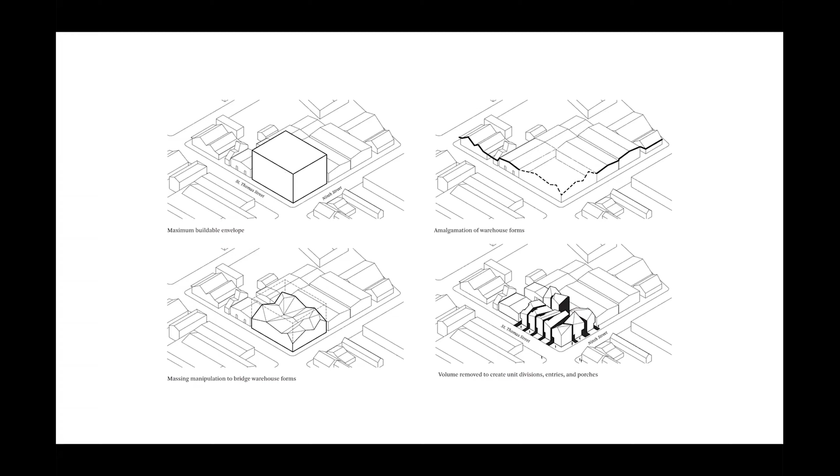This session is really going to be focused on both financing and development strategies that have worked in the past. So we have a really amazing panel of four developers and financial brains, who have really done this kind of work in Los Angeles and across the country. The last session, September 3rd, also a lunchtime session, is going to be focused on a couple of different housing policy topics that can show you how you might be able to leverage the small lots in this initiative to build some really great housing developments.

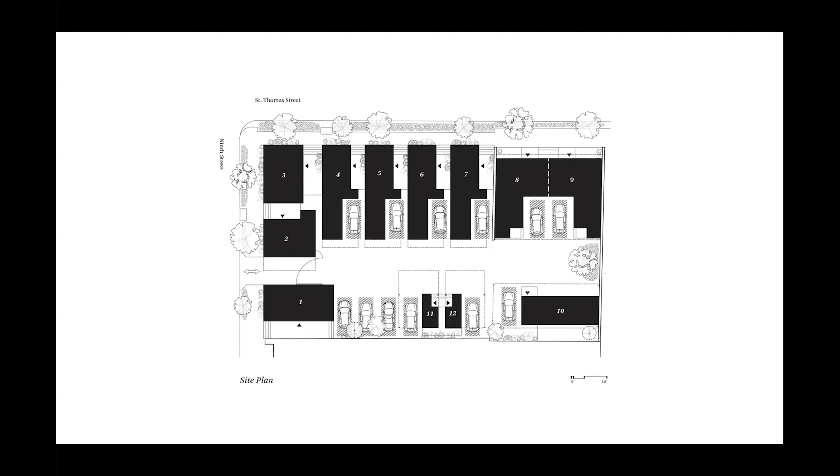Then after him, John Perfitt's going to talk. John's a local developer, been working in LA for many years now, mainly under the moniker, maybe you know him best, at RNLA, a small affordable housing developer who's done a lot of really great work in the city. And then lastly is going to be Tom DeSimone. Tom's another great friend, someone who's been on the project for a long time and also been helping us shape Small Lots since the beginning. Tom works for an organization called Genesis LA that invests in and finances housing and other developments all across Los Angeles too. So that'll be the breadth of experience from all four of them, and then we'll get into some questions.

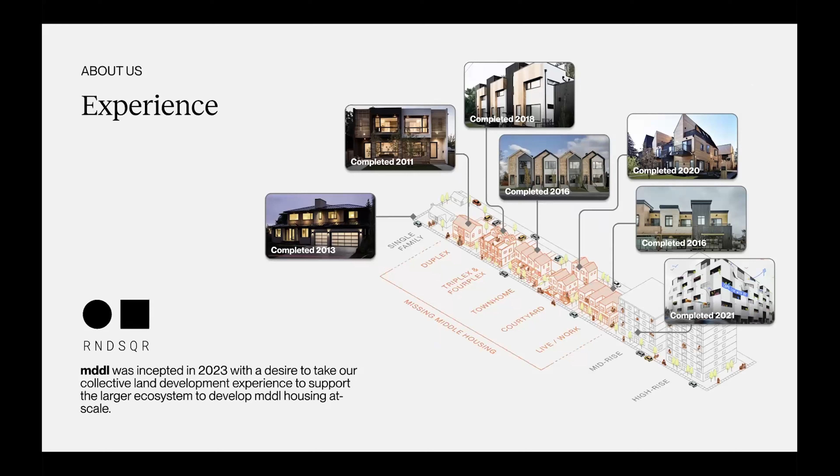But they were all challenging lots. They were small. Typically we called them non-conforming lots, essentially lots that were smaller or irregular, that didn't neatly comply with the zoning ordinance's definition of a standard lot. So we found these all throughout the city. They looked different and were located in odd places.

And these aren't all multifamily. A lot of these are singles and doubles. I realize the scale of what we're looking at here in LA may be a little bit larger, but I think it's interesting to show in this context.

Just to run through a summary of those: the first one, on a small sliver of a lot between a warehouse and an adjacent historic property, was an infill single family house that we developed for sale. These were all speculative houses, not custom homes for individuals. We speculated that there was a market for this, and we found the land to try to utilize that. This was the first project we did, a single family house on a tiny lot. Just for scale, the lot itself was about 16 feet wide, and the house with setbacks is 10 feet wide by 45 feet deep.

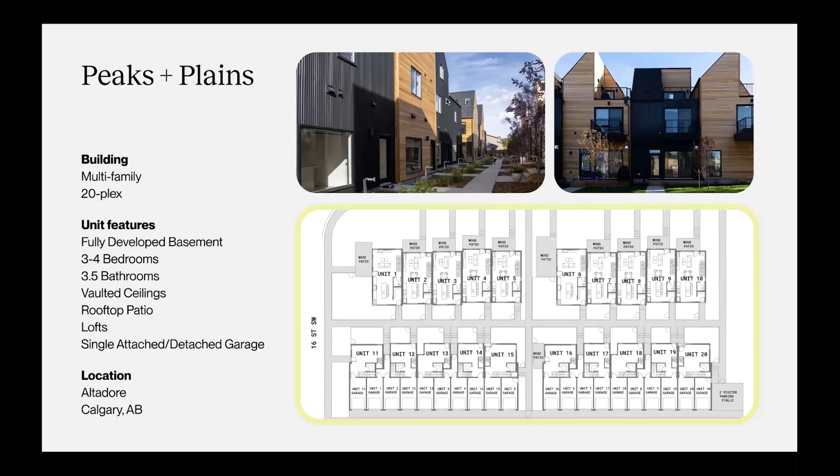That was our objective: how to make it as simple, clean and direct as possible for a home buyer. How do we provide that, or facilitate that. In this case, we had a chance to do 12 units, but the land divisions only allowed for three essentially.

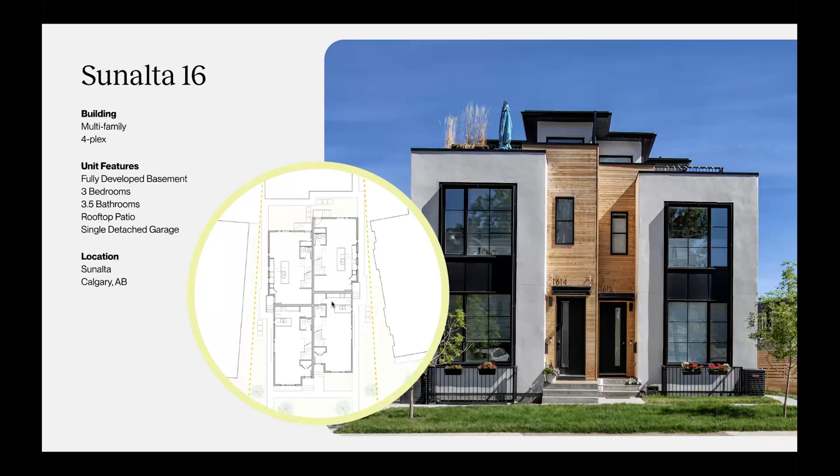So our subdivision regulations were not favorable in this case, and we ended up challenging that. I want to quickly walk through this project and highlight some of the things we discovered and were able to leverage, things I think are potential opportunities you all may see in your own city. Through some imagination and a slight bit of skill, we were able to turn it into a successful project for us.

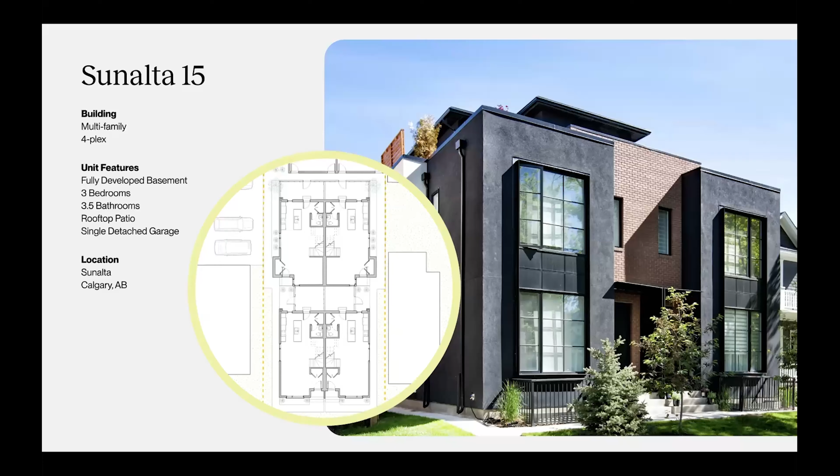One thing was property allocation in general. If the regulations didn't permit us to have 12 single family buildings on the site as simple lots, then we turned to the condominium regime. We crafted a regulatory overlay, or ownership overlay, on the site that comported with the objectives we had for the project. So what you own and what you didn't own, we defined as part of the condominium regime.

Through that, we looked at what the limits were for us in terms of the zoning envelope, but also identified the need for this to work within context, which was sort of light industrial but also very historic, like 1850s-ish residential. So it's a mixed fabric, if you will. We had to navigate both of those, and a desire to provide maximum density, but at the same time really try to mesh it into this fabric.

This is the final project from overhead, you can see here. A few quick things: property allocation, and how we divided the units, were really a big part of how this worked. We wanted each of these to be standalone residences. This is one of the major benefits, when we ended up building these as just detached, basically 12 detached units on site, it created a lot of opportunities for us.

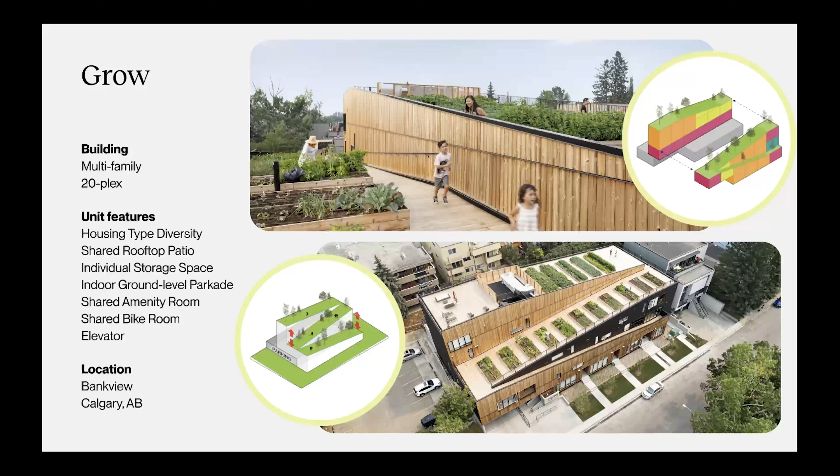With the condominium regime, we all know, in both architecture and development but also in ownership, the sort of fraught nature of a condo organization and regulation. Whenever we created the detached home, everybody owned their property, and they were no longer contingent on their neighbor. So separating those was a big thing for us.

The other thing, when we separated the buildings, we were able to use the IRC versus the IBC. So in this context, even though we were doing a multifamily project, we leveraged the residential code versus the commercial code, which saved a lot and made a big difference in how the development worked out. Furthermore, it enabled us to independently insure each of the properties, so it wasn't a collective policy in this case.

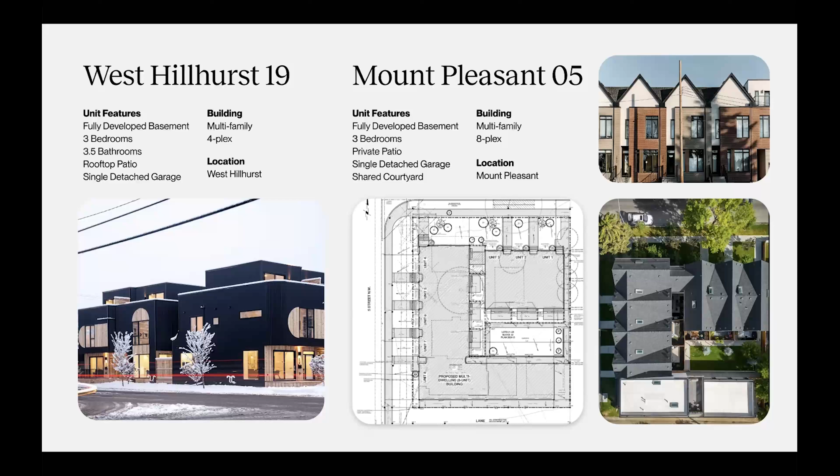And then even with financing, it turns out we didn't have to do any bridge financing like you might on a typical multifamily, where you have to sell 50% before going to perm financing. Because they were all detached, they went straight into permanent financing. So quickly, to wrap up, the project was 12 units of housing, basically three-story developments, all isolated from one another.

It was kind of running through the images, as I said earlier, the idea that it meshed with context. It was also important for us to say where was your front door, where was your front porch. How did this project engage with the community and mesh with the housing fabric that was already there? These are just a walkthrough of how it worked with that existing fabric. We were around a lot of warehouses, but how did we embrace that? How do you make something in this context, that's quite dense, very livable? We thought part of that was obviously the unit itself, but how that unit communicated with the neighborhood around it, and with the residents around it.

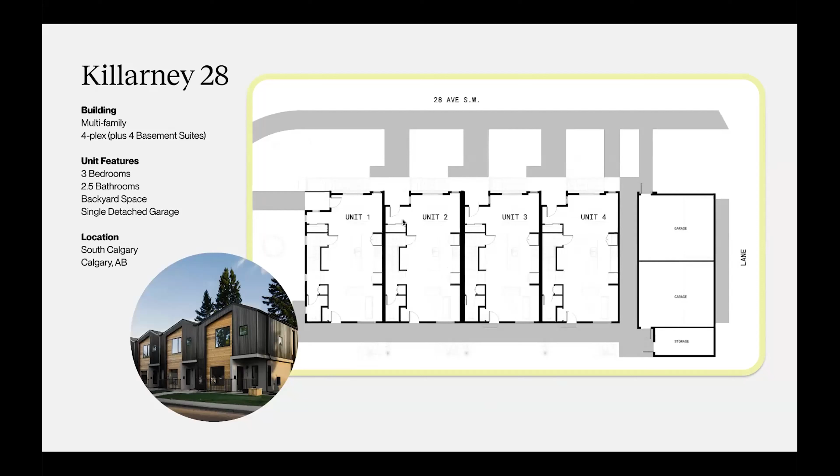So that was one project I wanted to highlight out of that whole grouping, one that I think might have some similarities with what you all are looking at there in LA. So I will stop and allow someone else to grab that.

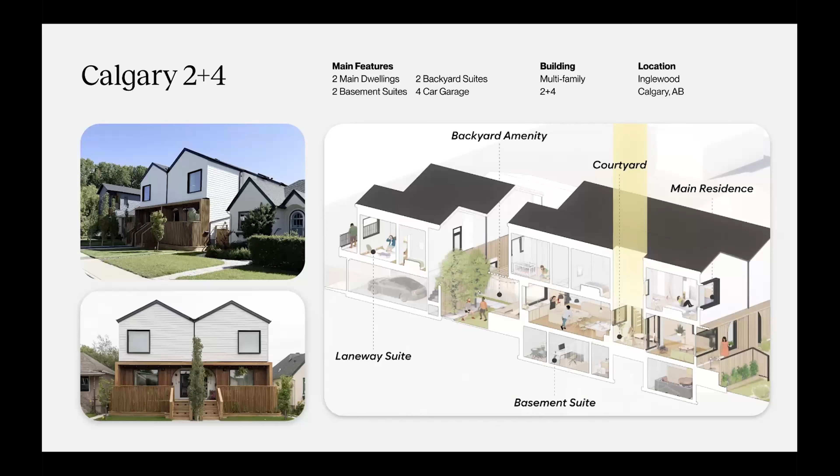I just want to touch on our model at mddl real quickly. We're doing capacity building, policy innovation, and developer enablement. I'll talk about some of those as I go through. We're supporting over 500 units right now, have supported over 500 units and over $1 billion with our team.

And as I've said, I've worked on a number of different projects in a number of different sale and ownership capacities. I'm going to throw up a slew of projects and I'm happy to talk through them. This is the first one for me that I actually did back in 2015. It was prior to Calgary even having a missing middle housing policy or zoning that allowed for it to happen. And so we actually helped with the inception of this policy. Since 2015, Calgary has had over 3,000 applications, I think close to 20,000 units that are on the books for middle housing. So prior to 2015, we didn't have an ordinance that even allowed for this.

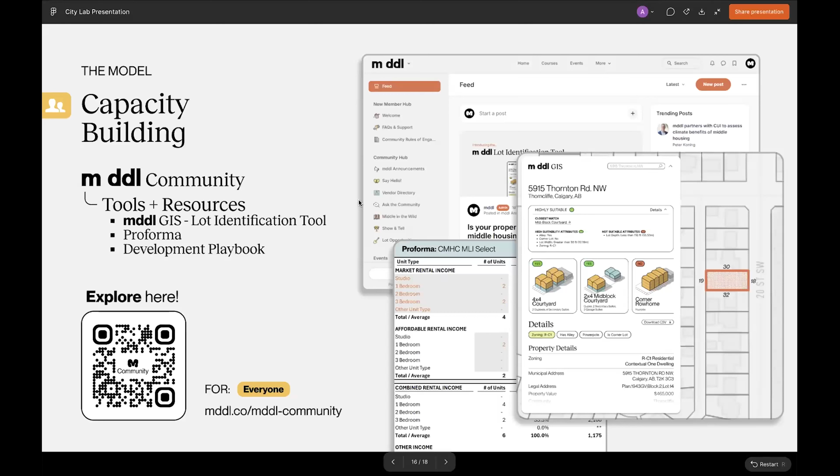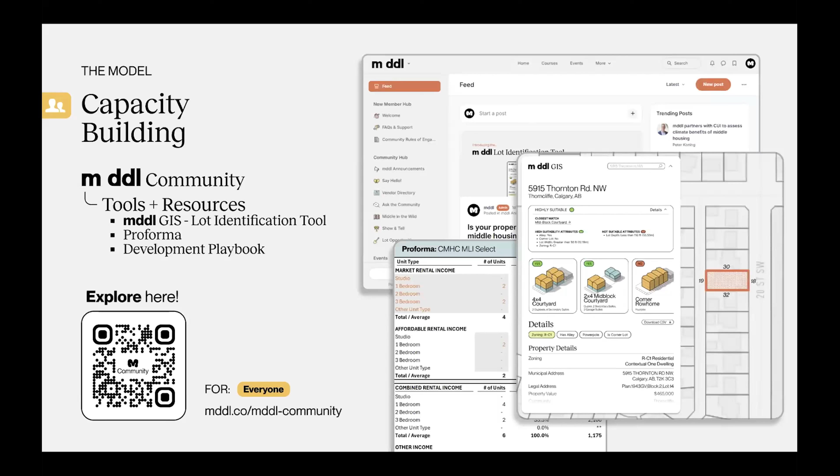The other cool thing about this project, which you can't see here, is we were the first project to introduce a waste and recycling system called Molok. They're underground, kind of buried - basically 3 buried cylinders. If you don't know it, they pull these cylinders up, untie the bag, and place them. That was in the alleyway, and the city didn't even have pickup for this.

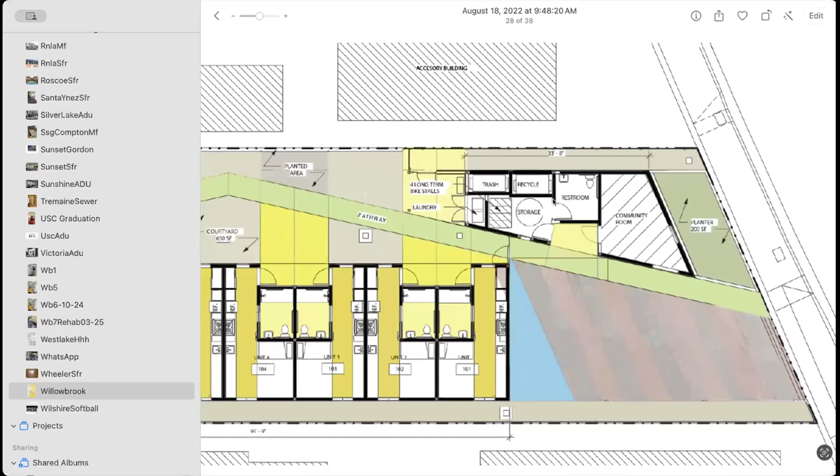So we were able to get 8 units as of right in this project. You can't see it, but there's a forced condition here where this unit goes downstairs into this kind of basement unit. So we have 4 affordable units in this basement, and then 4 units up top.

And then we went on to build, like I said, over 300 of these. They're all purpose-built rental, they all have affordability. On site, you're only parking 4 of the units, which are the townhome units.

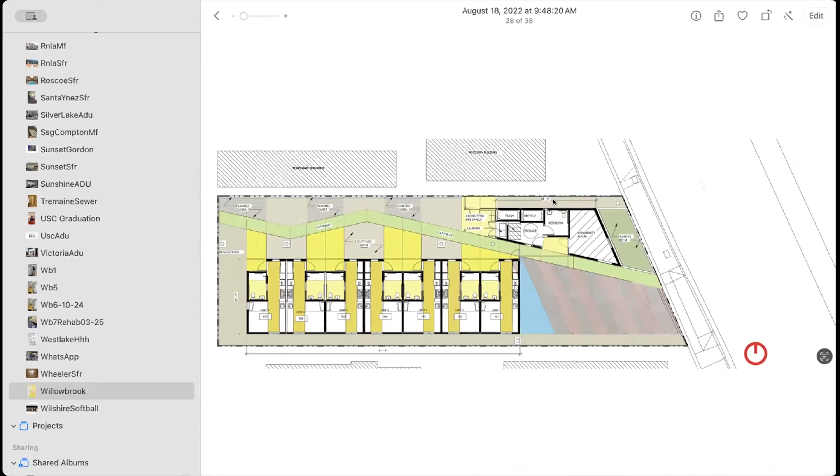These are 3-bedroom, generally family-oriented. And so all across the country, we start to see middle housing developers starting to benefit from that financing program and really starting to build at this scale, which was really cool to see.

So the last project I'll share is a response to what's been happening in our city. I talked to Manos about this, probably important for you folks. It's this idea that when the scale of the projects you build starts to really resonate in the city...

...and you start to see, sorry for my language, really shitty examples of it, it makes it really tough in the community because you start to get an incredible amount of political pressure from the folks that make decisions. Your building codes start to change the rules, and you can kind of feel the momentum moving.

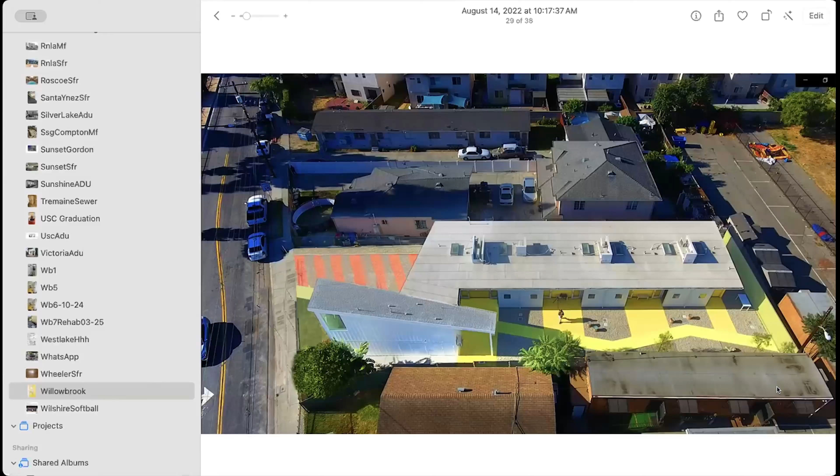And so what was happening is, on any lot now, since I think last year in Calgary, you can do 8 units as of right on any single family home.

Folks were basically slamming 8 units into really terrible structures in these mid-block scenarios. So we tested this idea: could we get to maybe 6 units, presented from the street as a duplex, but obviously have more units.

This was the first pilot project we did to resemble that. It's got two laneway units off the back, two family-oriented units up to 4 bedrooms, and basement suites. This was really cool because all the development industry told me it wouldn't work.

What we were able to understand was, by doing only 2 primary units, we didn't have stormwater management requirements, and we were able to build under a section of the code that didn't require as much from a fire rating perspective. When we looked at the savings and the fact that we had zero community pushback, we sailed this thing through — it actually performs a lot better.

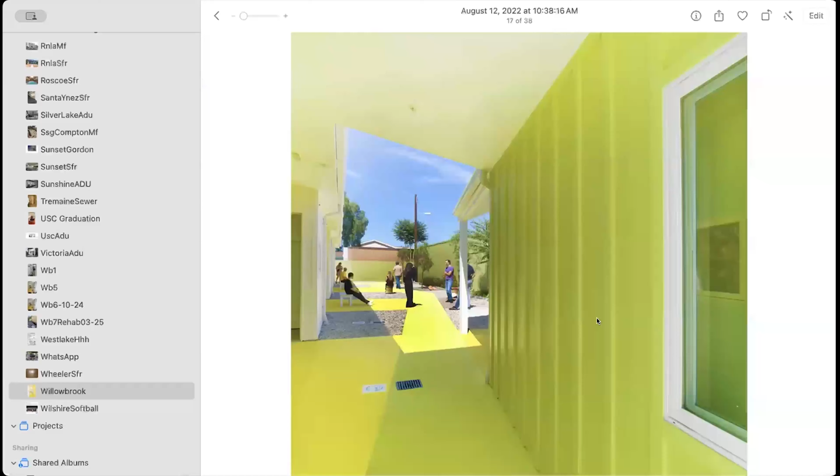It's unique in terms of what it offers the market, because all those townhomes top out at 1,200 square feet. Folks in the inner city who traditionally live in these infills wanted bigger units and 4 bedrooms, and we were able to achieve that in this project.

A lesson for me is that the city is oftentimes not as fast-thinking as we are in certain departments. So policy really understood this and liked it, but now building code, on the second iteration we're trying to build, is coming back and saying they want full sprinklers for this project — which would essentially kill it and make you go back to having to do 8 units as of right.

So that's kind of it for me. I think the one thing — just because Jonathan was touching on it, and if any of you want to chat I'm happy to share — is we built some GIS tools with the work we're doing with municipalities. Building off Jonathan's work, we went out and mapped cities using GIS technology to identify how many homes could actually deliver middle housing. We have 7 cities mapped across the country right now.

We're starting to allow pre-approved plans to be loaded onto our site, so a homeowner can type in an address and it's linked to our version of Zillow, where you can see what's available and what meets the requirements — connecting folks to this type of density faster. We've also built a Proforma tool, and a community tool which allows people to connect and learn from other folks' experiences.

We're doing our first modular pre-reviewed, approved plan in the city of Kelowna — a building permit within 10 business days, fully modular, 6 units. We're doing a bunch of work across the country, and I think it's super exciting. The big thing I've been really excited about is this idea of supporting other folks in the community to deliver, because we need better examples and more people working at this scale. So I'll leave it there, Manos.

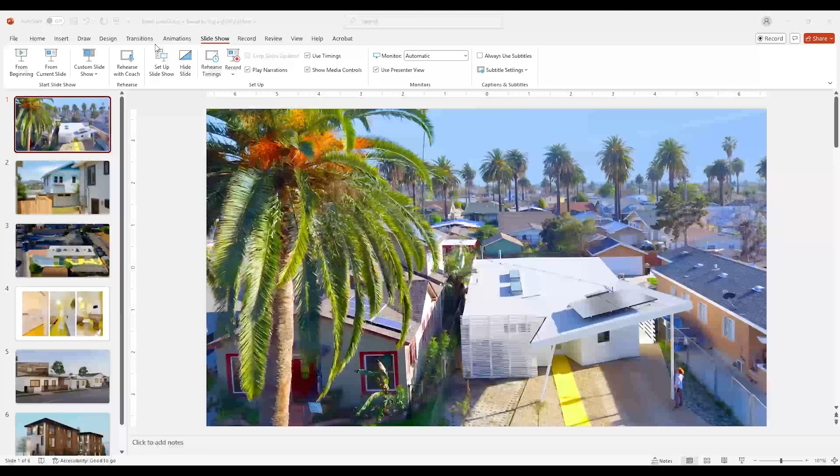Greetings to everybody, John Perfitt here with RNLA and Building Blocks, based out of Los Angeles, California. I'll get into profiling a project that's pretty relevant because it also includes another panelist who was involved with it — it's a Willowbrook project — but I'll get into that in the latter part of my presentation. Good to be part of this.

I'm an infill developer who has been working at this for 25 years. I'm also a general contractor, so I try to learn all the dirty little secrets on both sides, with developers as well as with contractors. I used to think construction was easy when I just did pure development, but then I started doing construction and learned they both have their own difficulties for sure. We've been involved mostly in LA County, in just about all kinds of housing typologies, totaling more than 1,000 units over the last 10 or 15 years.

Those being large multifamily projects on larger sites, adaptive reuse projects that are usually housing. We've done some parks and assisted the city with some park development. We also focused on over 300 single family residences in a residential rehab and somewhat of a tear-down and new construction program a few years back.

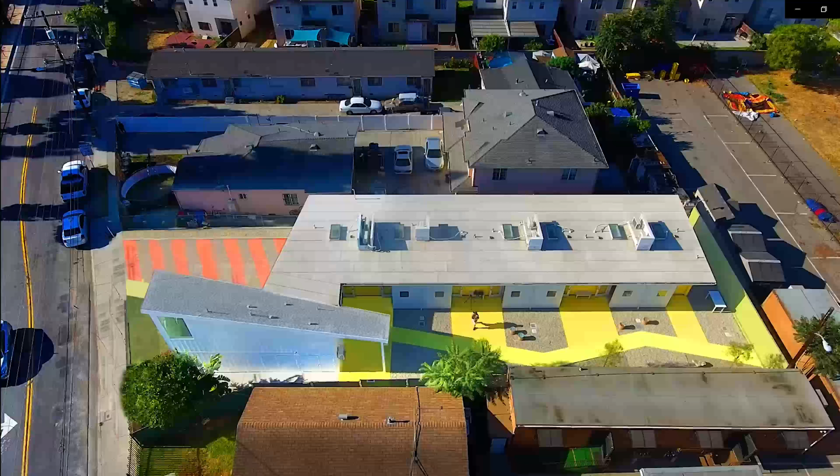Myself, I've worked on - I'm quite schizophrenic, I like to joke - because I've been on the public sector side for more than 10 years, the nonprofit side, and the for-profit side. I worked in redevelopment, which wants to harness some of the capacity of the private sector while being chartered as a public sector entity. It doesn't really exist in California anymore, but it did for a long time - it was called redevelopment. I also taught at USC's Price School for 15 years in urban planning, mostly finance and development finance to graduate students in the planning programs there.

So that's a little bit about the history of RNLA, Building Blocks, and me. I'd like to do a quick run-through of a project I worked on that has been operating for about a year and a half.

This is one where we're taking small sites and trying to make as much multifamily as we can. We call it sensible density, in that we don't want to go for any discretionary actions from the city of Los Angeles because that's super expensive and time consuming. So we like to find sites that can maximize density without discretionary actions, using the off-the-shelf by-right density bonuses and things like that. The project I want to show you is called Willowbrook.